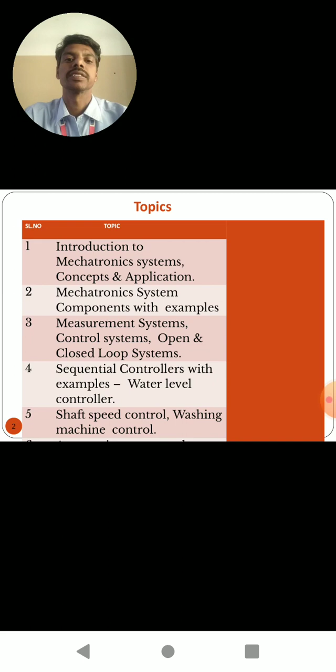Introduction to Mechatronic System. The word mechatronics originated from Yaskawa Electric Company from Japan in 1969. It spread throughout Europe and is now commonly used globally. The word mechatronics is composed of mecha from mechanism and tronics from electronics.

Moreover, mechatronics solves technological problems using interdisciplinary knowledge consisting of mechanical engineering, electronics, and computer technology. In 1996, Harashima, Tomizuka, and Fukuda defined mechatronics as the synergetic integration of mechanical engineering with electronics and intelligent computer control in the design and manufacturing of industrial products and processes.

Bolton gave the definition for mechatronics engineering: a mechatronic system is not just a marriage of electrical and mechanical systems and is more than just a control system. The mechatronic system is a complete integration of them all.

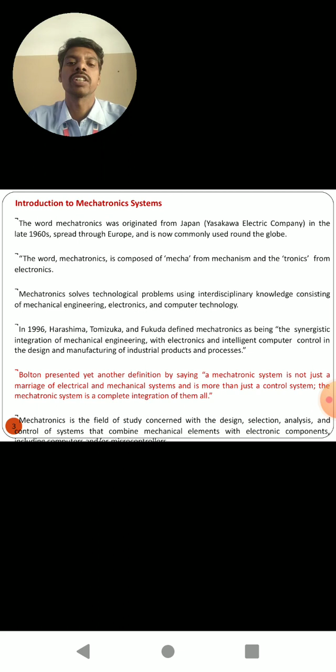Moreover, a working definition for mechatronics is the synergetic integration of sensors, actuators, signal conditioning, power electronics, decision and control algorithms, and computer hardware and software to manage complexity, uncertainty, and communications in engineering systems.

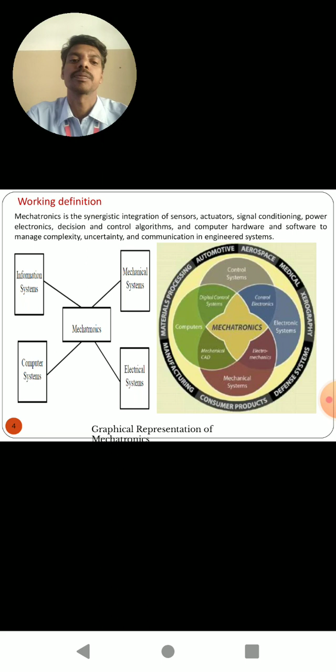The graphical images depict that, based on the definition, mechatronics is the combination of information systems with computer systems for mechanical systems and electrical systems. For more understanding of the definition of mechatronics: mechanical with CAD, integrated with computers and digital control systems, will make mechatronics.

Sometimes control electronics and control systems will interface with digital control systems of mechatronic systems. In other words, electromechanical systems interfaced with electronic systems and control electronics are also called mechatronic systems. Sometimes mechanical CAD creates a design, the system becomes a mechanical system, and with the electromechanics concept it will create a mechatronic system.

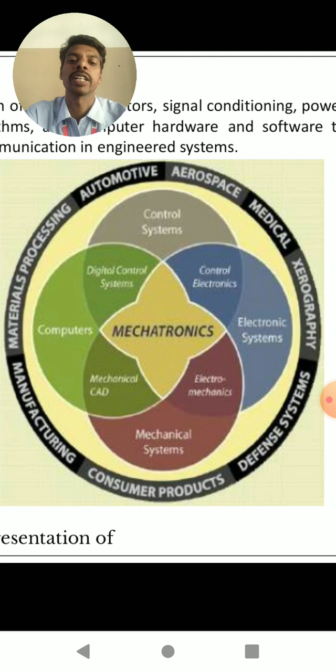Evolution of mechatronics. The technological advances in design, manufacturing, and operation of products or devices can be traced through various eras like the industrial revolution, semiconductor revolution, and information revolution. Let us discuss them one by one. First we will discuss the industrial revolution.

Here, products and processes were designed for energy conversion and transmission, allowing the use of energy to do useful work. Engineering designs of this era were largely mechanical. For example, motion transmission, sensing, actuation and computation were performed using mechanical components such as cams, gears, levers and linkage mechanisms.

Purely mechanical systems suffered from an inability to amplify power, and energy losses due to tolerance, inertia and friction. This is overcome through the technology applications of mechatronic systems.

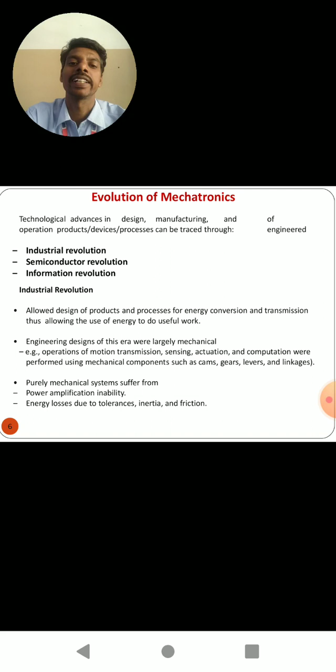A bimetallic strip or thermostat element is used to measure or control the temperature in mechanical systems. It was later replaced by mechatronic systems.

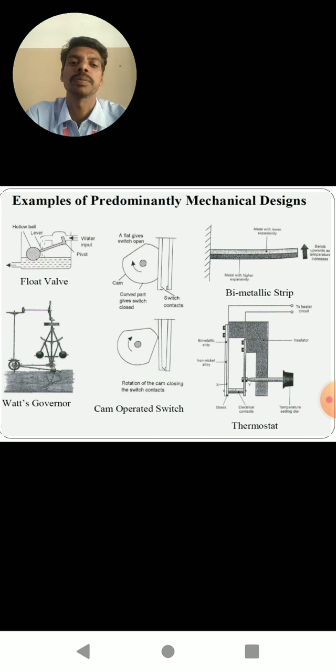Semiconductor revolution. Integrated circuit, or IC, technology was created in this era. Effective miniaturized power electronics could amplify and deliver the needed amount of power to actuators. Signal conditioning electronics could filter and encode sensory data in analog or digital format. Hardwired onboard discrete analog or digital integrated chips provided computational and decision making circuits for control of mechanical devices.

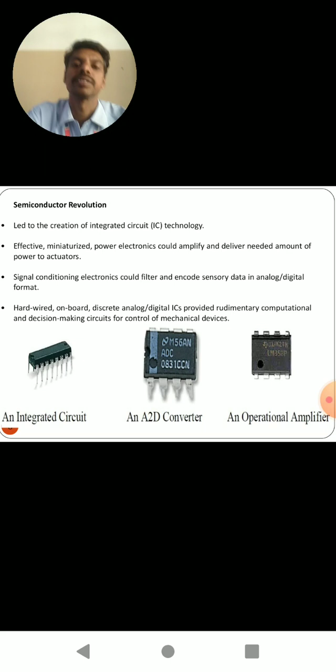Information revolution. The development of VLSI technology led to the introduction of the microcomputer, microcontroller, or microprocessor. Now computing hardware is everywhere, cheap and small. As computing hardware can be effortlessly interfaced with real world electromechanical systems, it is now routinely embedded in engineered products and processes for decision making.

Microcontrollers are replacing precision mechanical components like precision machined camshafts that in many applications function as timing devices. Programmability of microcontrollers provides a versatile and flexible alternative to hardwired analog or digital computational hardware.

Integrated computer-electrical-mechanical devices are now capable of converting, transmitting and processing both physical energy and virtual energy, that is, information. The consolidated result of the information revolution era is that highly efficient products and processes are now being developed by judicious selection and integration of sensors, actuators, signal conditioning, power electronics, decision and control algorithms, and computer hardware and software.

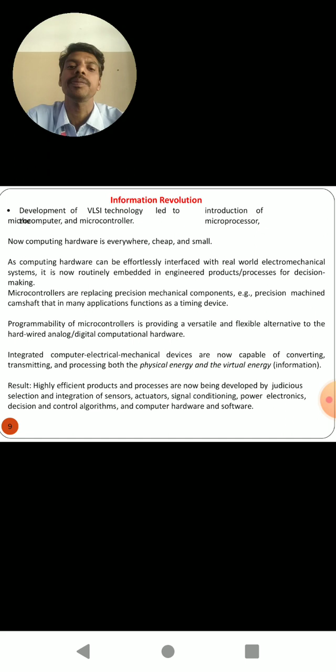Mechatronics has evolved through various stages, named primary level, secondary level, tertiary level, and quaternary level of mechatronics. Primary level mechatronics integrates electrical signaling with mechanical action at the basic controls level. For example, fluid valves and relay switches are used in this primary level of mechatronic systems.

Secondary level mechatronics integrates microelectronics into electrically controlled devices. For example, a cassette tape player is an example of secondary level mechatronic systems. Tertiary level mechatronics incorporates advanced control strategy using microelectronics, microprocessors, and other application specific integrated circuits. For example, microprocessor based electrical motors used for actuation purposes in robotics and robo cars, etc.

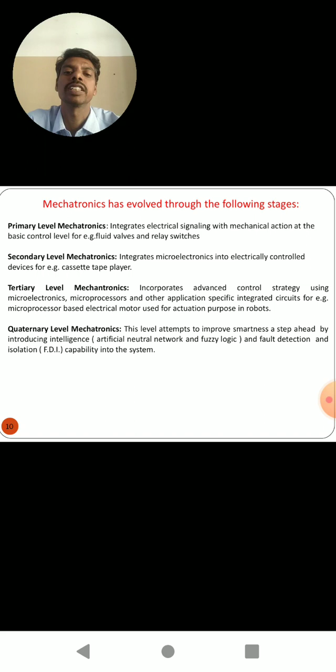Mechatronics applications. Smart consumer products: home security, cameras, microwave ovens, toasters, dishwashers, laundry washers and dryers, climate control units, and automatic digital cameras are some of the examples of smart consumer products. Computer disks, VCR, DVD drives, ATMs, etc. are also the latest trends in the mechatronics applications category.

In the medical field, implant devices, assisted surgery and haptic devices are examples of mechatronic systems. In defense, unmanned air, ground and underwater vehicles, smart weapons, and jet engines are some of the examples in the defense field of mechatronics. In manufacturing sectors, NC and CNC machine tools are the examples. Moreover, rapid prototyping and robotics are in the same category of mechatronics applications in manufacturing sectors.

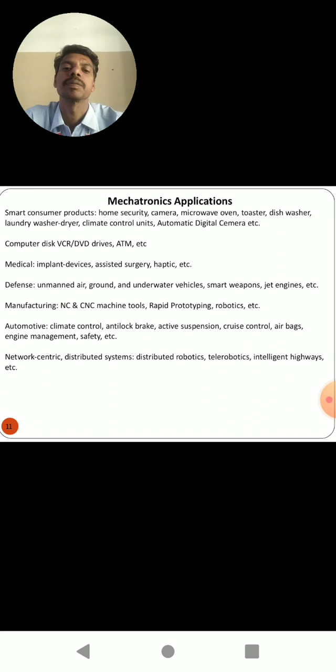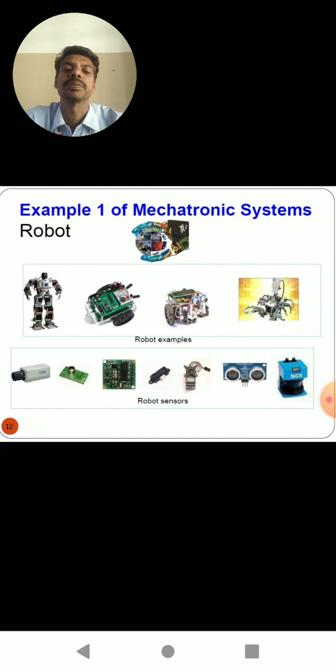Here the pictures depict examples of robots as well as robot sensors used in mechatronic systems. Another example is the indirect involvement of mechatronic systems: the motion and force control of an indirect drive robot used for some applications is shown here.

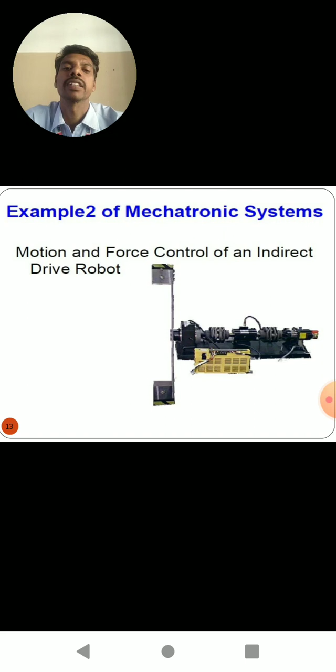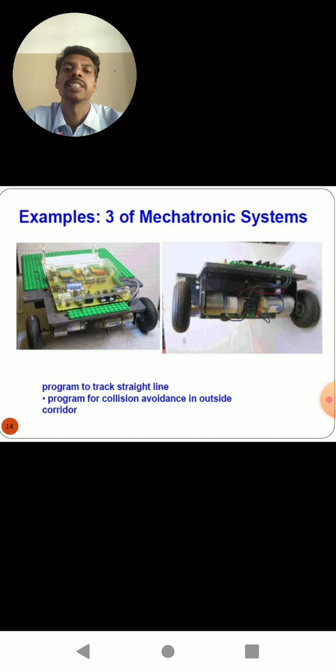Another example of a mechatronic system is robots that track a straight line or identify obstacles to avoid collisions; line follower robots are some of the examples of mechatronic systems shown here.

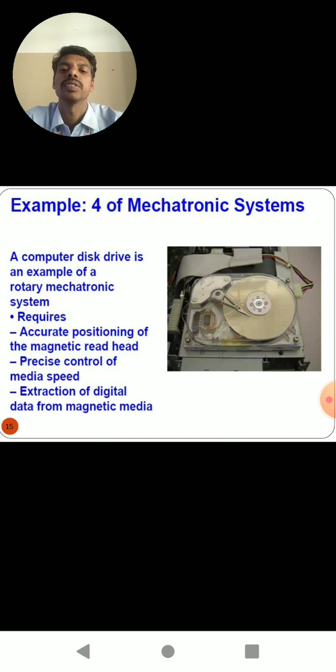Another example of mechatronic systems: here the computer disk drive is an example of a rotary mechatronic system. The basic requirement of this system is to provide accurate positioning of the magnetic read head, precision control of media speed, and also the extraction of digital data from the magnetic media. These are the major objectives fulfilled by mechatronic systems used in a computer disk drive after implementing the mechatronics concept.

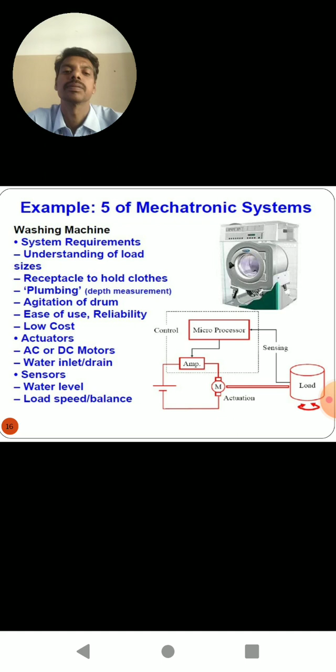Some of the advantages of mechatronics are cost effectiveness and good quality products, a high degree of flexibility to modify or redesign to suit customer requirements, bringing the best product to the marketplace, very good performance characteristics, a wide area of applications, greater productivity in manufacturing organizations because of the automation we are implementing, and greater machine utilization without any losses or errors.

Some of the disadvantages of mechatronic systems are high initial cost because of the huge number of components involved in creating a mechatronic system, a multidisciplinary engineering background required for design and implementation because concepts from other engineering departments are integrated, and the need for highly trained workers because most mechatronic systems are complex and work based on programming controls.